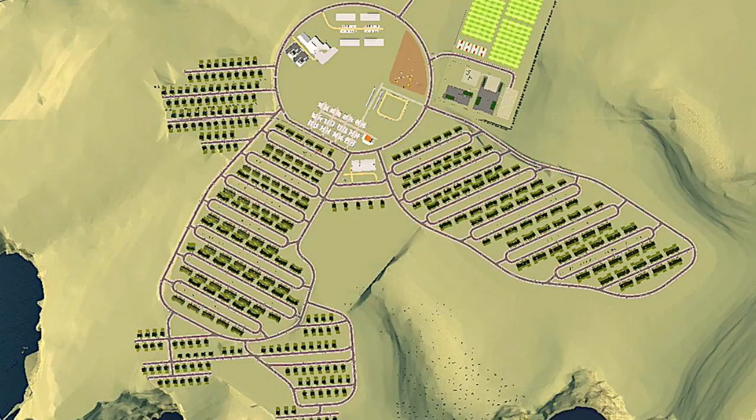It should be noted that these have been designed as shell elements only, taking into account the plant area required and producing first stage cost estimates, as well as the estimates for the specific energy requirements.

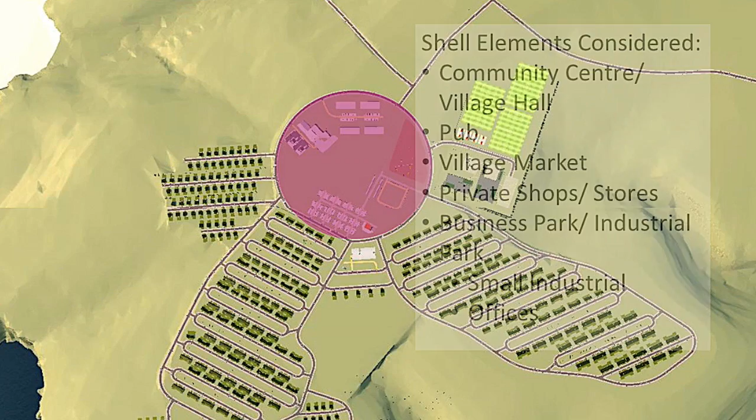The infrastructure design for the village includes outline designs of combined heating and power plants and sewerage plants, as well as road design and the design of street lighting, to name but a few of the elements.

The school, which is located near to the centre of the village, has been designed as an outlined structure, such as stating the materials to be used and the key structural elements.

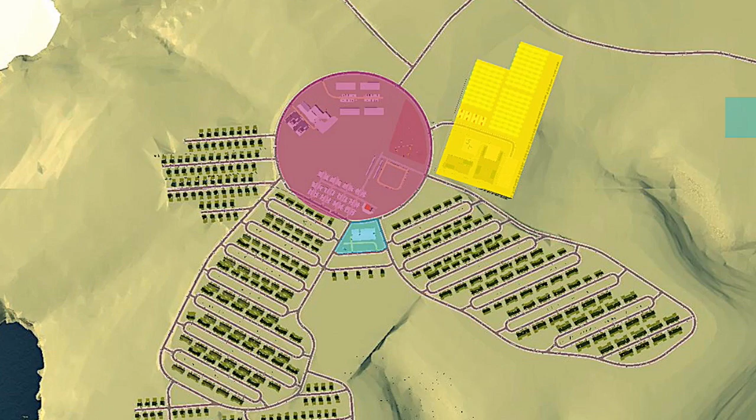The housing, which has been designed in detail, is to radiate from the centre of the village, with no section of the housing being completely separated from the overall community. Further to this, area for further expansion has been identified.

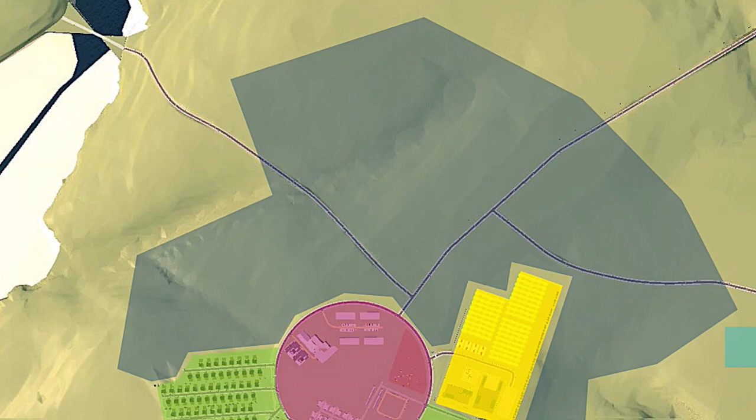The tidal energy generation system, which has been designed in detail, is to be located to the west of the village in the River estuary.

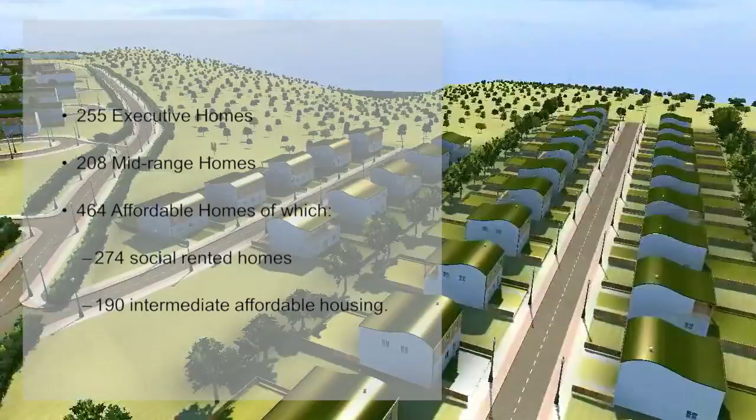Following the guidelines set out by the South Hams District Council, the proposed 927 new dwellings for the eco-village will comprise of 255 executive homes, 208 mid-range homes, 464 affordable homes, of which 274 will be provided as socially rented homes and 190 will be provided as intermediate affordable housing.

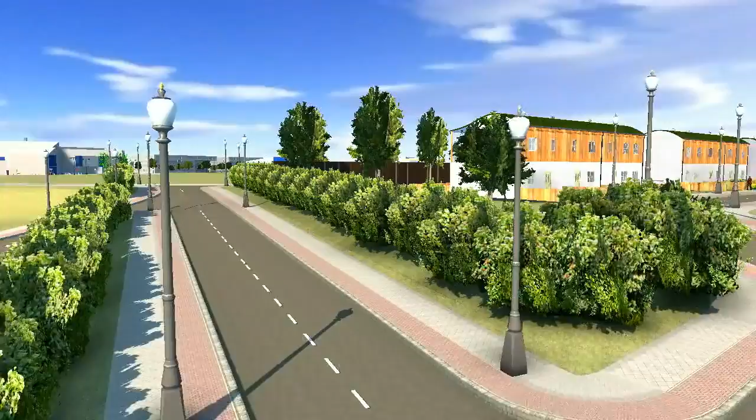With sustainability at the forefront of Eco-living Ltd's objectives, the housing has been designed to Code Level 6 in accordance to the Code for Sustainable Homes.

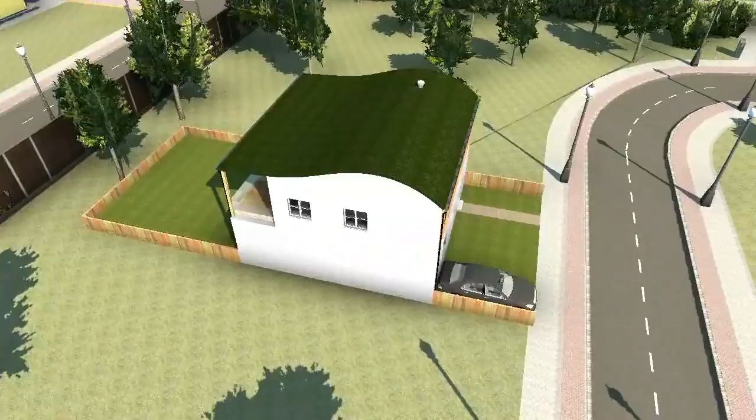To achieve this level, the major aspects that have been designed to the required standards set out in the Code for Sustainable Homes are the materials, opting for materials with low thermal conductivities and low embodied energy, and the use of insulated concrete formwork for all load-bearing walls, which will ensure the build of airtight dwellings with very little air leakage.

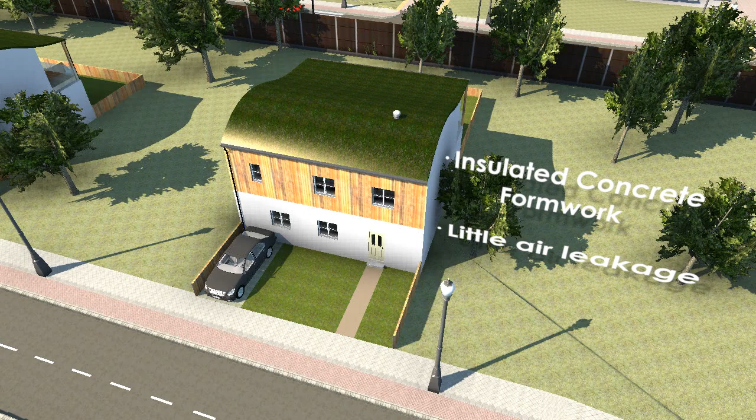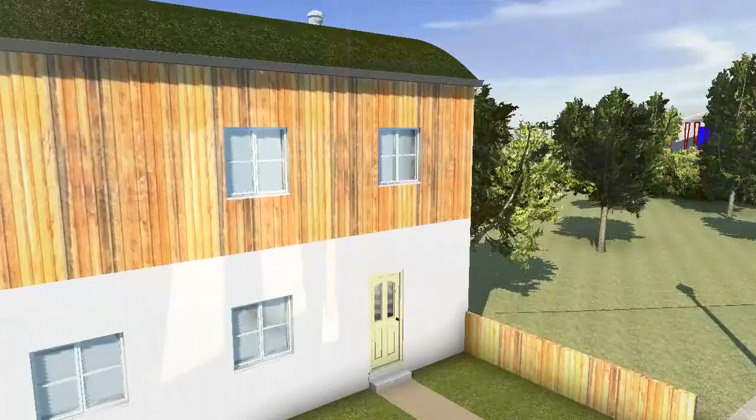The cost of this ICF system is cheaper than the alternatives of masonry or timber frame when constructed to Code Level 6. To reduce the embodied energy used, 50% of the CEM 1 Portland cement is to be replaced with ground granulated blast furnace slag.

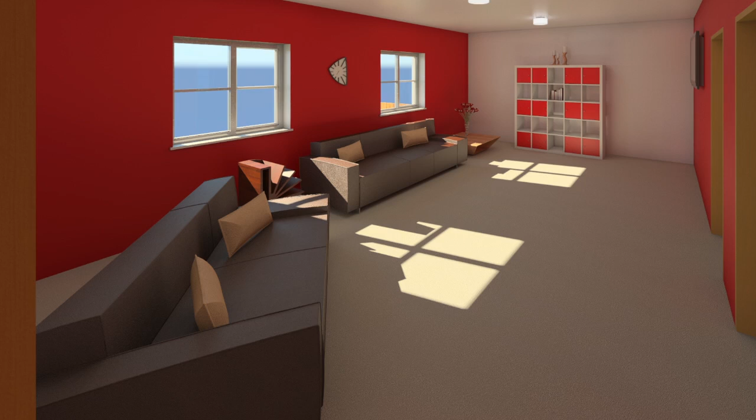The white goods and lighting systems were chosen to minimise the power demand. The specific heating demands were calculated for each dwelling. A mechanical ventilation system with heat recovery is to be used, and sedum roofs, minimising surface water runoff, have been used on each house.

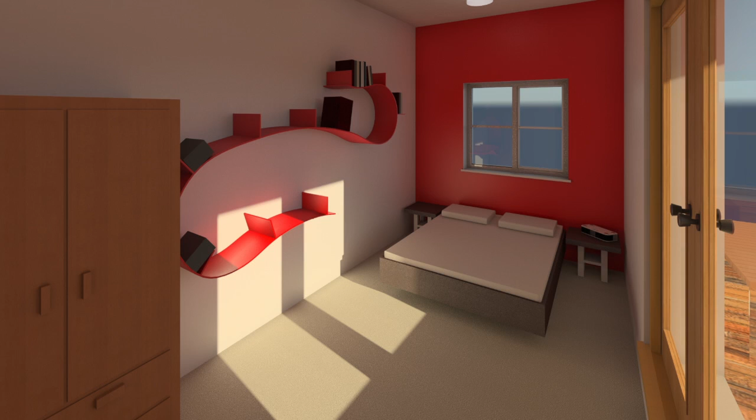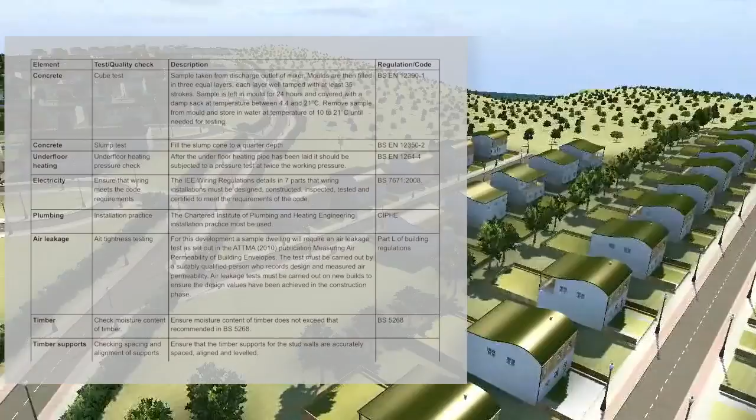Additionally, the houses have been designed to be structurally sound in accordance to the relevant Euro codes. To ensure that the houses are built to the high quality set out by Eco-living Ltd and the necessary regulations, quality tests will be undertaken during the construction phase of the project, as seen in the table.

The school is designed to cater for 300 primary school children, with the ability to expand and cater for a further 200 pupils at a later date. The white goods and lighting systems were chosen to minimise the power demand.

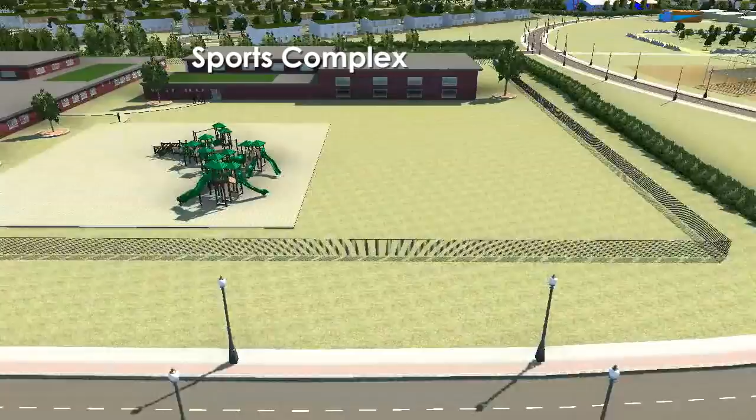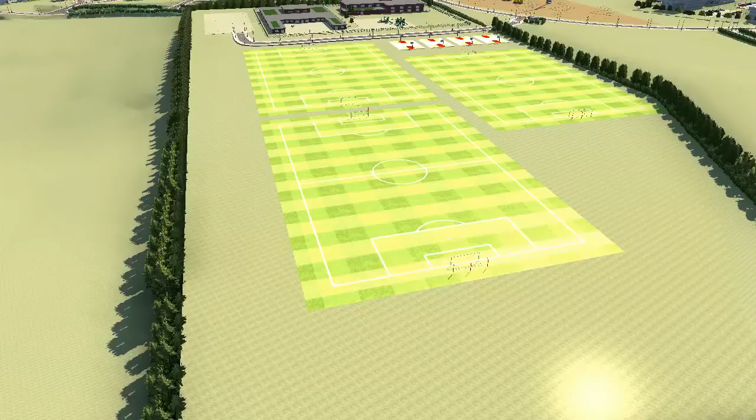The specific heating demands have been calculated for both the school and the sports complex. A green sedum roof construction will be used on some areas of the school and sports complex roofs. Alongside the environmental benefits of using a sedum roof, the amount of rainwater runoff will be reduced.

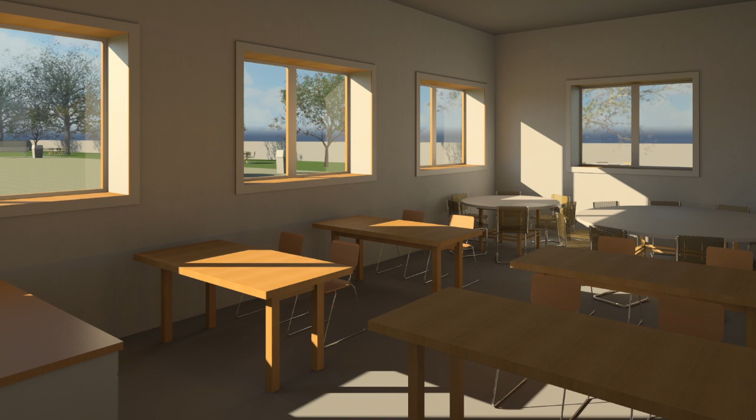A non-green roof will be used over the long span beams to ensure there is less load transmitted into the structures. The classes will be exposed with the use of internal glass windows, which will create an open but safe teaching environment.

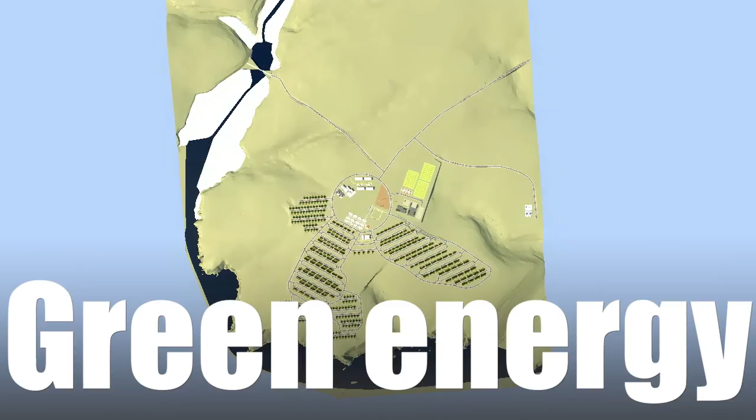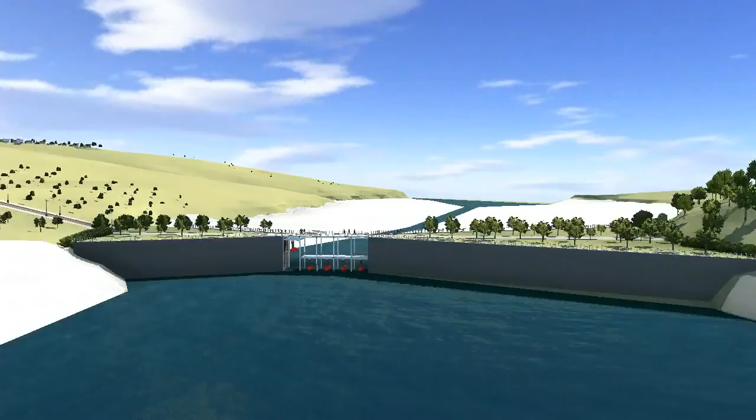The energy generation site is to be located approximately 1.1 kilometres upstream from the mouth of the river estuary. This location has been selected because of the large tidal catchment area available, the mass flow rates experienced, the fact that energy can be produced approximately 80% of the time at this location, to prevent exposure to adverse sea conditions, to provide a minimum distance across the river with access capabilities, and the selected site will allow for easy integration with the South West Coast Path.

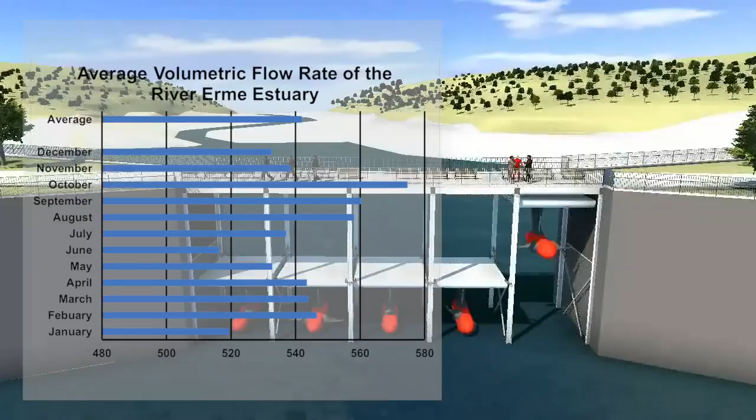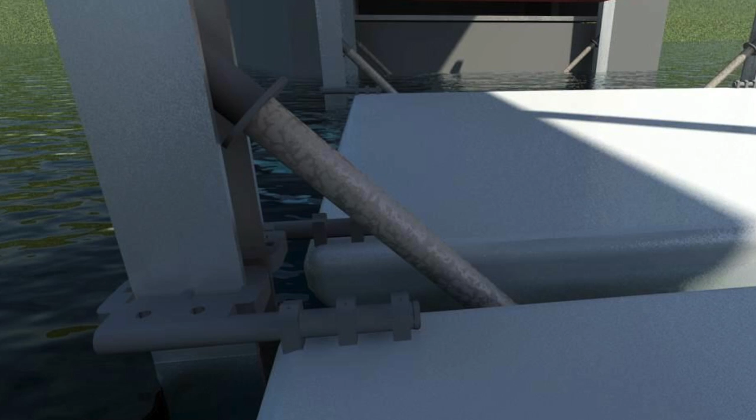The average volumetric flow rate of the estuary has been calculated, providing the necessary information to design the turbine array. 5 Tocardo T200 turbines have been chosen to effectively utilise the flow velocities of the site. The turbines are to be supported on floating frames, fixed to a bridge structure using rollers. All structural design has been undertaken following the relevant Euro codes.

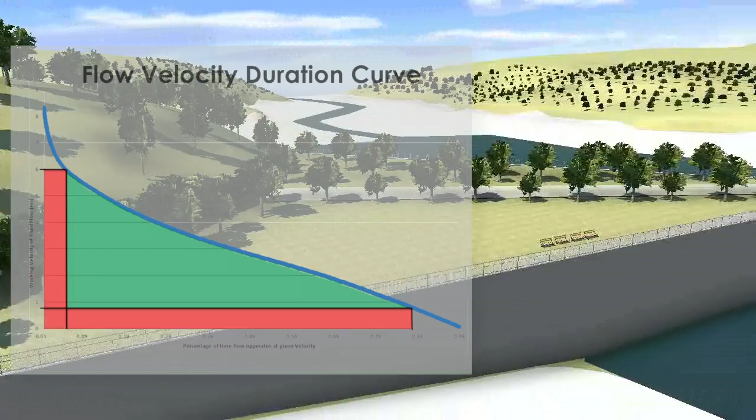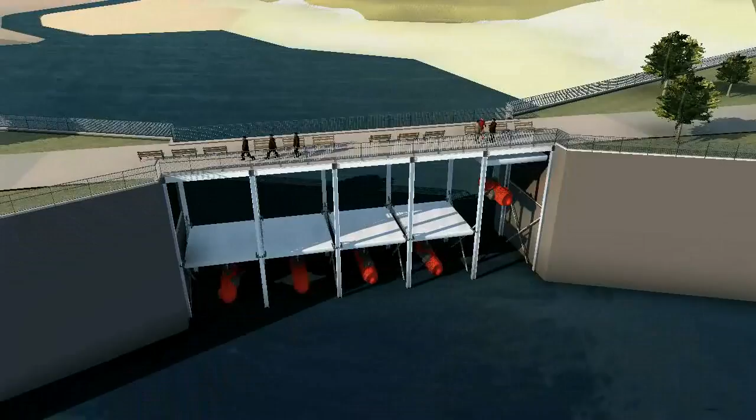This equates to approximately 14,000 megawatt hours across the system per year, enough power to supply over 4,000 homes. Including the sewerage waste disposal plants and the combined heating and power wood pellet plants, the total energy output of the village has been calculated to be 16,000 megawatt hours, or a revenue return of approximately £2.8 million per year.

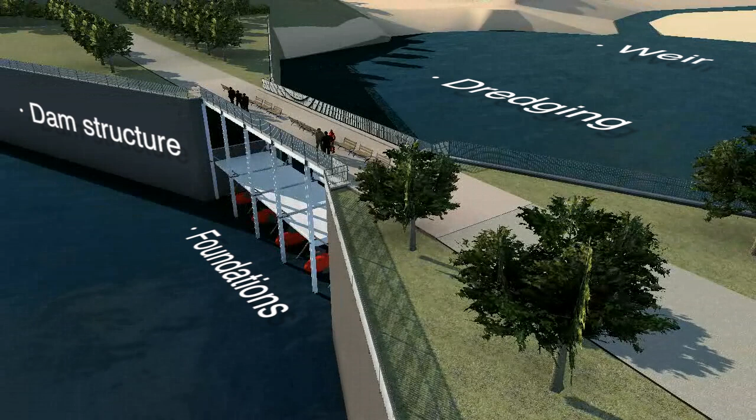The construction of the tidal energy site will be achieved in 4 phases. First, the weir and foundations will be constructed, then the dredging and the installation of the dam structure to narrow the estuary width will be undertaken. This is to be followed by the installation of the bridge support structure, and finally the bridge deck and turbine systems will be installed.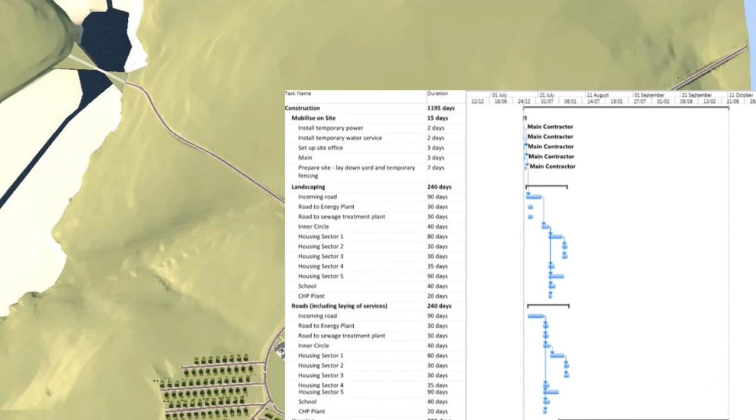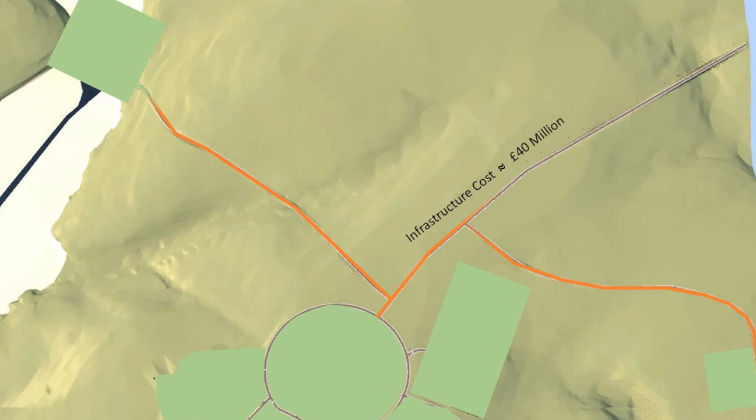A full construction implementation plan has been devised in detail in relation to the overall construction of the Eco-Village project. The project will start with the initial groundworks for the primary roads into the village and to the energy and sewerage plants. 3 weeks after the initial groundworks, the installation of main roads and services can begin.

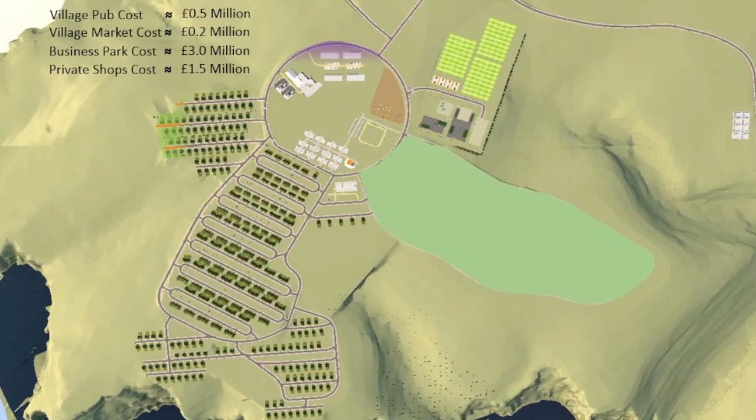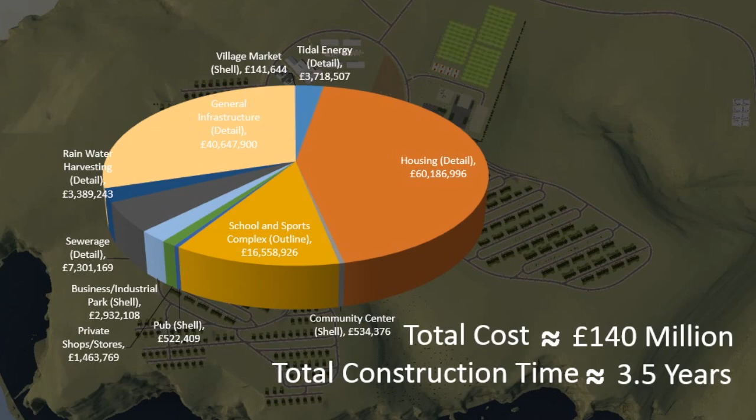This process of initial groundworks and final construction will then be undertaken throughout the village in zoned stages. This will allow residents to move into completed sections of the village before overall completion, helping the cash flow. The total construction period of the Mothecombe Eco-Village will be around 3.5 years, with an overall estimated cost of £140 million.

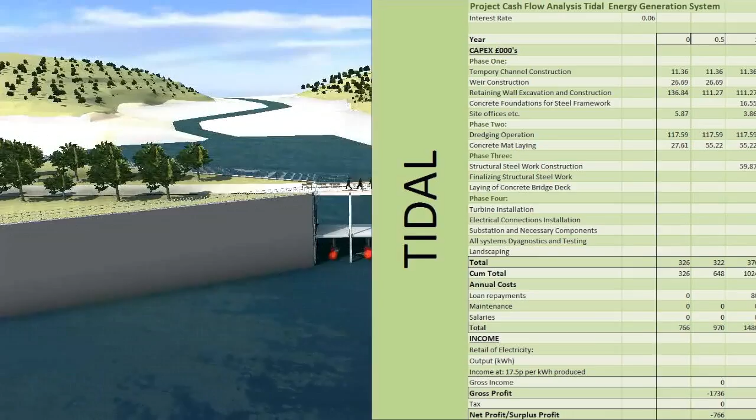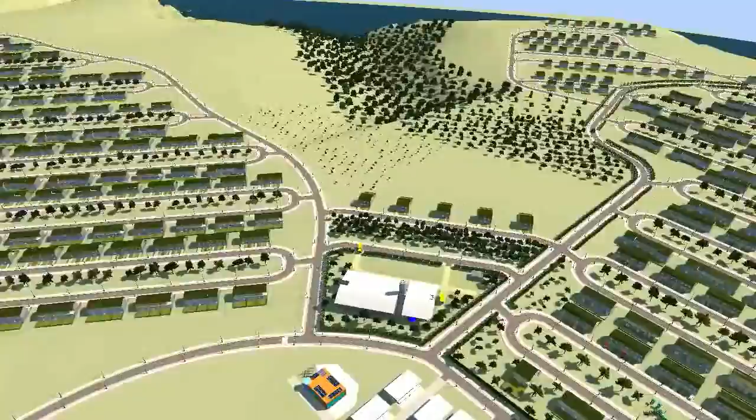The cash flow analysis has been calculated for two of the main elements of the Eco-Village: the tidal energy generation system and the housing. The total construction cost for the tidal energy generation system is £3.7 million, with a construction time of 3.5 years, yielding an internal rate of return on net profit of 27%. The total construction cost for all of the proposed housing is £60 million, with a construction time of 5 years, yielding an internal rate of return on net profit of 160%.

Using the PRINCE2 project management methodology as a guide, a risk assessment relating to Eco-living Ltd's ability to deliver the Mothecombe Eco-Village project has been undertaken.

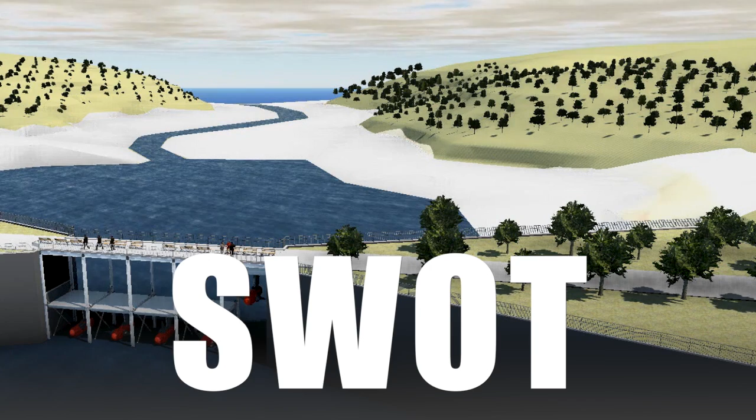Eco-living Ltd has carried out a SWOT analysis. To summarise, a key strength is that we are young, motivated, multidisciplinary engineers. Our main weakness is that the company consists of inexperienced employees. A major opportunity is that we are an emerging company at a good time where sustainability is a very current issue. The company's main threat is that we are the first to design an eco-village of this magnitude, creating the potential for competitors to learn from any mistakes made and subsequently progress quicker.

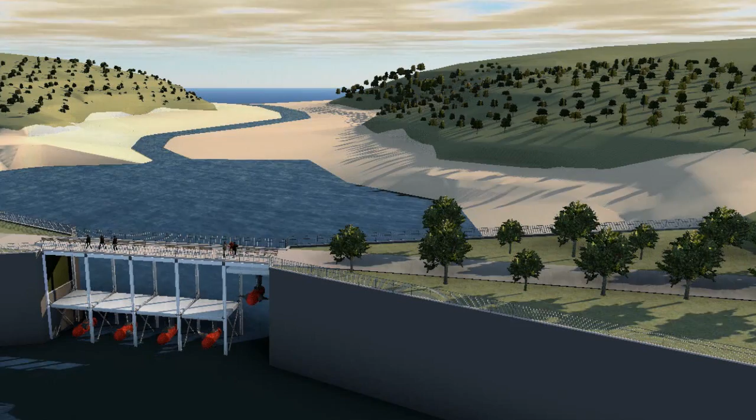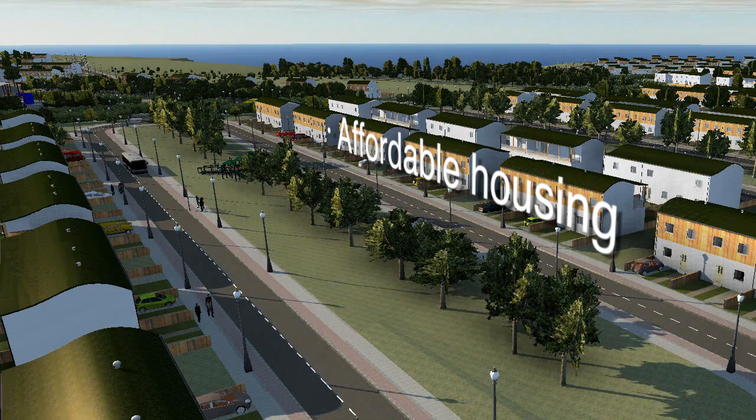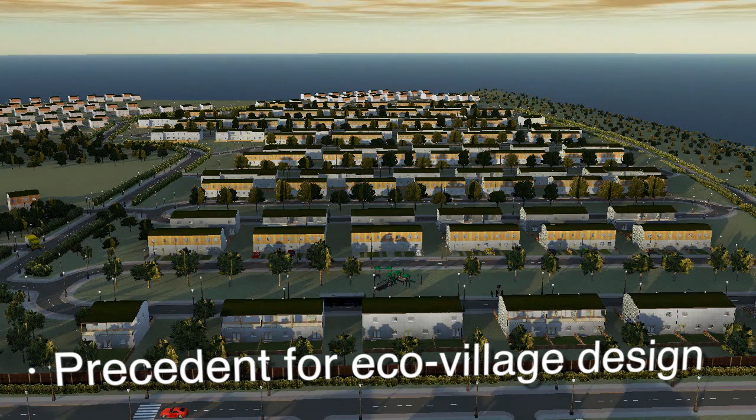So, why should you invest in this project, which would allow us to move forward with the build phase of our proposal? Help this young, dynamic and enthusiastic company produce full eco-communities where residents feel part of their community. Provide needed affordable housing to the South Hams district. Help us to implement groundbreaking environmental technologies. Set the precedent for eco-village design within the UK and around the world. And be part of a movement that will preserve and improve our planet's fragile ecosystem.

We have laid the roots. Help us to grow the rest.